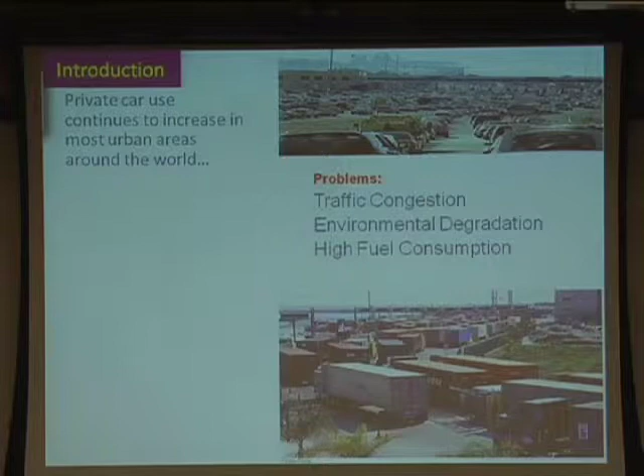Okay, so we're going to be changing gears, literally and figuratively, and we'll be talking about the real source of demand, if you wish, the real cause of demand for energy, and that is the transportation sector, and particularly the people who drive every day and actually consume all that fuel. And part of our focus here is a problem that we see daily, that is traffic congestion and the associated environmental degradation and high fuel consumption that goes along with that.

Now, congestion wastes fuel, okay? And that's why we're talking about it here. That's why when we look at energy demand and controlling that demand and curbing it, we have to look at how our system, in fact, is wasting fuel and wasting it big time. So congestion wastes fuel, and there's been various estimates of how much is actually wasted, that is, because of inefficiency in the operation of the system. Okay? So you're essentially throwing away money and precious resources through the kind of scene that we experience on a daily basis in our cities.

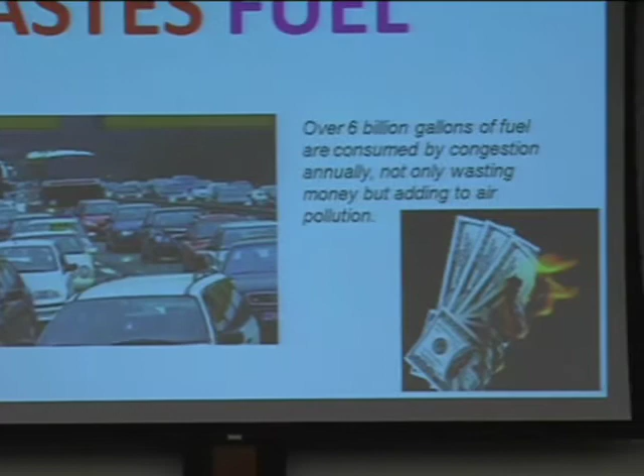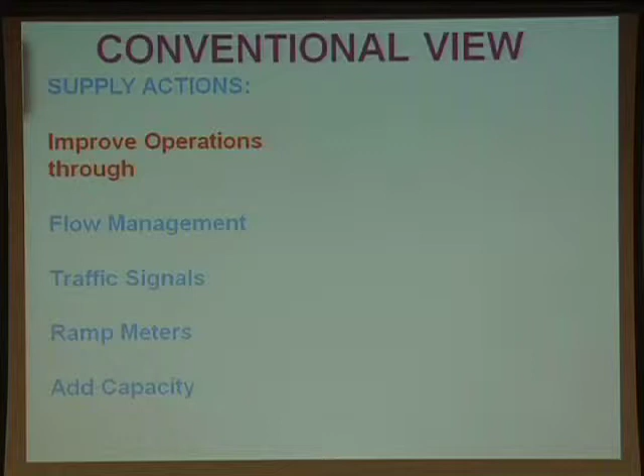Now, the conventional view for dealing with these problems is that you can take various supply actions, that is, try to improve operations through flow management, traffic signals, ramp meters, adding capacity physically. These are all actions that normally will improve flow for us. And you also have a set of demand measures where you influence the demand for travel, particularly travel decisions of route, mode, departure time, decisions to participate in various activities, to telecommute, to change the trips, decisions to own more vehicles in a given household or to reduce reliance on the private automobile, location decisions, where to live relative to where one works, and so on.

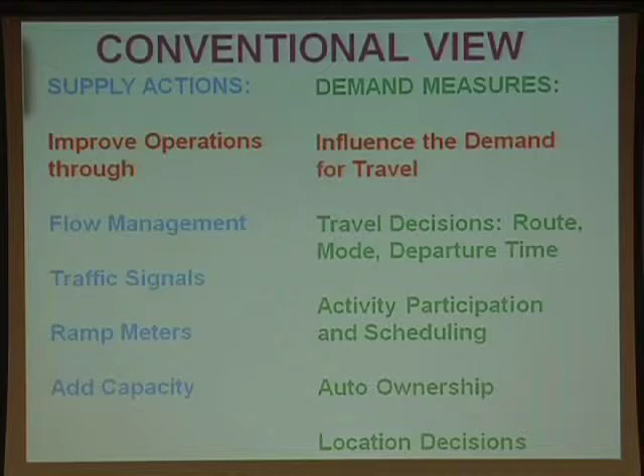So a lot of the field essentially has consisted of folks who try to improve traffic and then folks who try to improve behavior. But in reality, supply and demand interact very strongly in transportation, and both depend critically on the behavior of system users. And yes, this is who determines what happens in our transportation systems. And human behavior essentially is at the root of a lot of the system inefficiency that we experience, inefficiency in operation, inefficiency in fuel consumed, inefficiency of our delay time, and so on.

And we know, traffic researchers know, that the cognitive and behavioral limitations of human drivers are at the root of system inefficiency. Phenomena such as perception time lags, reaction times, and a natural tendency towards overreaction under stressful situations or perceived risk result in volatility, congestion, instability, frustrating stop-and-go patterns, phantom bottlenecks.

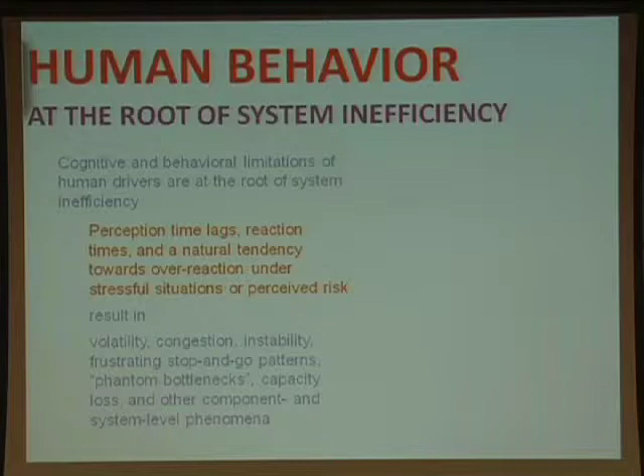You know how many times you've driven in traffic and you think there is something blocking it, only to find that there really is nothing, and people are just not moving. You know, that's perception, time lags. That's what we're talking about. So there's many collective effects that take place in traffic, and a lot of these inefficiencies that we observe are rooted in behavioral and cognitive limitations.

Similarly, if you look at travel decisions, you will find that behavioral considerations and attitudes of human drivers, households, and logistics managers are at the root of fuel-inefficient patterns. Activity patterns and resource allocation decisions obviously reflect individual preferences and lifestyles, but these were acquired during a time when fuel supply concerns were minimal.

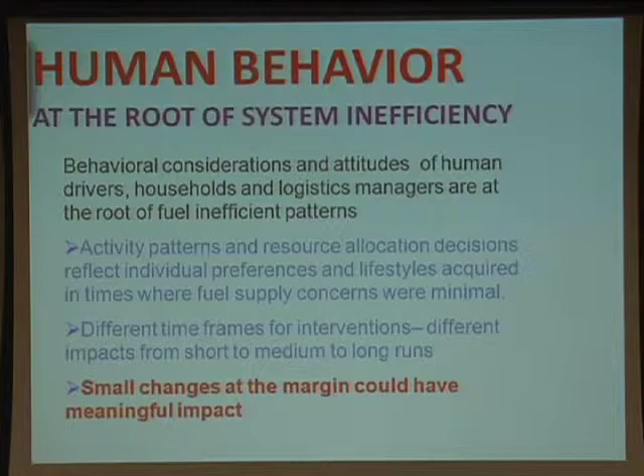People lived in the suburbs, got the big homes, big cars, and so on. And it's convenient, it's comfortable, but fuel concerns were not particularly an important consideration. And as awareness increases of these issues, and we try to affect people's behavior, of course, we're facing some ingrained attitudes and preferences that need to be addressed.

There's also different time frames for interventions and different impacts from short to medium to long run. But what is important and what I want to highlight is that small changes at the margin could have very meaningful impacts. And that's part of what I want to emphasize here. Now, behavior change is essential. What can one do? Travel less, travel more efficiently, travel green. I mean, this takes common sense to understand the kind of things that we have to do.

But on the other hand, as transportation professionals, as traffic professionals, we need to try and operate the system in ways that are more efficient for its users and for our system. Now, there are three main tools that we typically consider, that a lot of our research has focused on, to influence that behavior. One is through traffic controls, when you basically prevent people from doing certain things at intersections, at getting on freeways, and so on.

But increasingly, we have a very powerful tool, which is real-time personalized information. And we're just at the very beginning of really recognizing the potential of what could be achieved with real-time personalized information. And another tool is dynamic pricing. Of course, you have all forms of pricing through taxation, cap and trade, carbon tax, and so on. But in the traffic context, in terms of affecting congestion, you can essentially charge for the use of facilities and do it dynamically in such a way as to operate the system more efficiently. And that has been also a major focus of our research here at Northwestern.

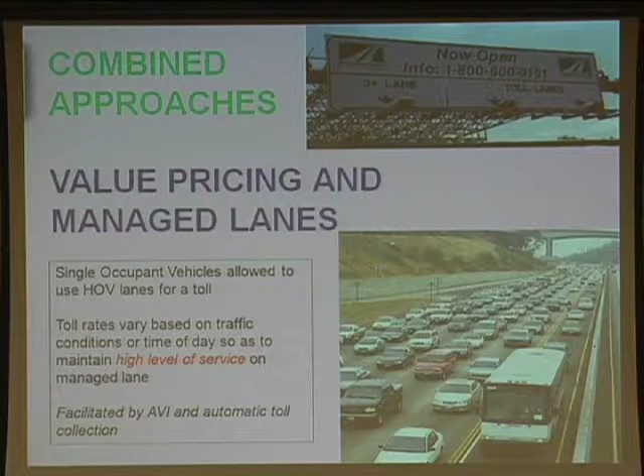Now, behavior change that we're interested in here, or what can facilitate it, is technology, particularly through intelligent management systems. And in this regard, there are two key realizations. One is that you can eliminate or reduce individual human error, and the system will operate more efficiently. And as I said, small changes in household and firm individual patterns could lead to significant gains in fuel-efficient, sustainable lifestyles.

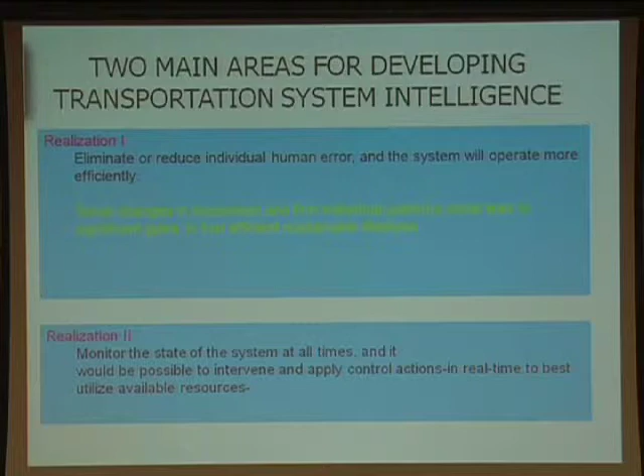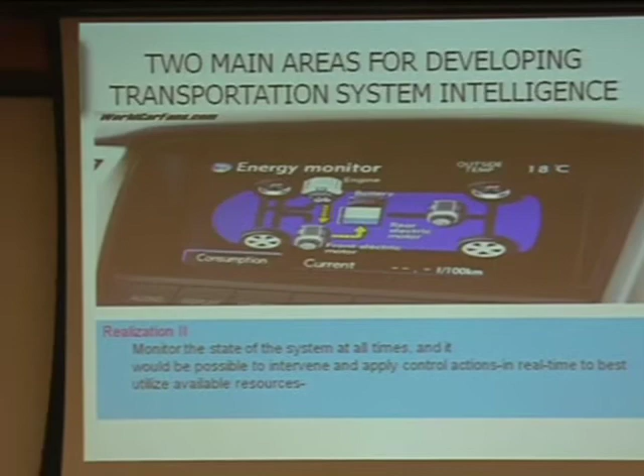The second realization is by monitoring the state of the system at all times, it's possible to intervene and apply control actions in real time to best utilize available resources. And this applies from the individual vehicle level to the traffic stream, to the entire network. The same logic of sensing, monitoring, predicting, acting, and implementing.

Some technological drivers: there's five of them that I view as critical to what we can accomplish in the transportation realm. The first one is in your pocket. All of us have wonderful handsets, which effectively have become small communicating devices, computers, displays, and so on. And what we can do with handsets is enormous and growing by the day, from navigation to commerce to social networking to purchasing and what have you.

Some examples of innovative applications: there's a company called CitySense in the Boston area that is providing a social networking capability on your cell phone.

Fortunately, I have videos that make these things move. I don't have them with me because it's not my machine. It's too complicated to link everything.

But these can be used to study travel patterns. They can also be used to see where your friends are, essentially, which bars they're going to and what have you. And you have probe-based connected navigation systems where essentially people have given up on the government trying to provide the kind of infrastructure and information services. And you now have private clubs, if you wish, that are emerging, where people are connected and they agree to report their information, essentially.

So you have GPS navigation in your vehicle or that's handheld, and you agree that your information is going to be reported to some central entity that is then using that to estimate conditions, predict them, and then give information back to the members of the club, those who are opting in. Some of these are beginning to emerge. They're relatively small scale, and the coverage is not large enough, but we're getting there.

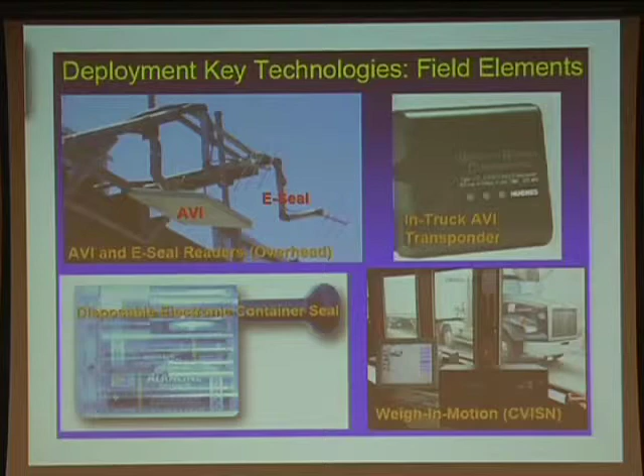But most large fleets are equipped with tracking devices, so you can know at all times where the trucks are located, can dispatch them, and operate your fleet more efficiently. Coupled with, again, technologies that were introduced for security applications but have implications for efficiency, such as electronic seals and readers at ports and so on.

Putting all of these together, essentially, the internet with mobility, you get telemobility and telelogistics. That may entail changes in the nature of activities, of what people are doing, their location, interperson, interfirm interaction, and the process of activity generation and scheduling.

Development number two are inexpensive wireless sensor networks. This is now giving us the view from the asset perspective, from the infrastructure perspective, and you combine the view from the particles themselves, the individuals, and the view of infrastructure or fixed assets, then you get a lot of real-time information. And again, a lot of the work that we're doing and areas where there's a lot of commonality between our agenda and that at Argonne's traffic analysis laboratory lies in developing the kind of methodologies for real-time decision-making given that kind of information.

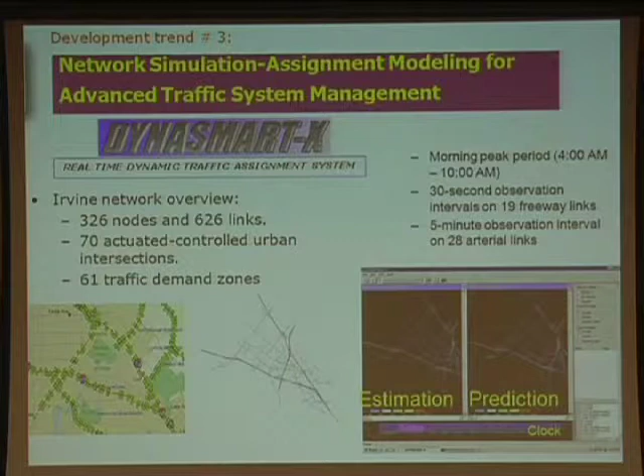And here at Northwestern, we're working on, again, real-time estimation and prediction software that can simulate large networks, estimate what is happening in the network, and then predict what will happen over the short term so as to generate control actions, and also to provide information to users. Okay? Talked about personalizing information.

Well, there's been a lot of interest in, of course, what information can do. And what was seen, in the initial wave of looking at this problem, is that information can make things worse. Why? Because people can overreact. You give everybody the same information on what you have now. People will do the same thing, and that will create congestion on facilities that are even less prepared to handle that kind of traffic. And so we know that the solution to this is prediction.

When you give information that is based on predicted conditions, not on prevailing sensed conditions, that poses certain challenges, namely trying to capture user responses to the provided information, the issue of consistency, the issue of reliability, and then computation for large networks. And that, again, is a specialty that Argonne, of course, is very well known for and an area of common interest for us.

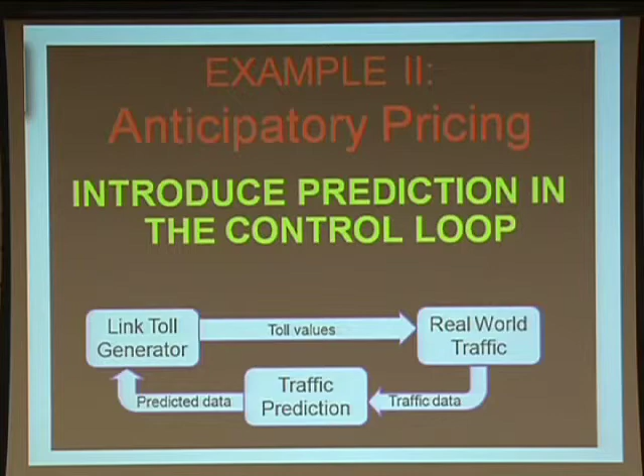Another example where we've been very active is to do the same thing, to use prediction for pricing, to introduce prediction in the control loop so that from the sensed traffic world, we can go into our prediction tools, our simulation-based prediction tools, and then set the prices accordingly. And we have found that we can, in fact, eliminate this breakdown through that particular process. Development trend number 4 is developing decision support tools for fleet management and collaborative logistics. I won't say very much about that.

And the 5th one, the area of peer-to-peer ad hoc networking. My colleague Fabian Bustamante here at Northwestern is one of the leaders really in this area, and it's one that holds a lot of potential for providing all of the benefits of connectivity among vehicles and really bypassing major investments in the physical infrastructure because the vehicles become the network.

Of course, it's not all about vehicles, and a lot of what we're trying to do is get people to use more efficient means of transportation. That, of course, typically refers to public transit. So how do we get people to make the change from this to this? Okay? Those of you who are experts in marketing recognize that you do not have a winning proposition in trying to get behavior change. Okay?

So we've been looking. What we need are more carrots, essentially, to induce behavior change rather than simply taxing or you cannot do this, you cannot do that, you cannot use your vehicle. You really need to give things that people are interested in getting. And we've been talking to a colleague in a new institute that's being set up here at Northwestern, an institute for massive change that Bruce Mau will be leading. And we're talking about reinventing the transit experience.

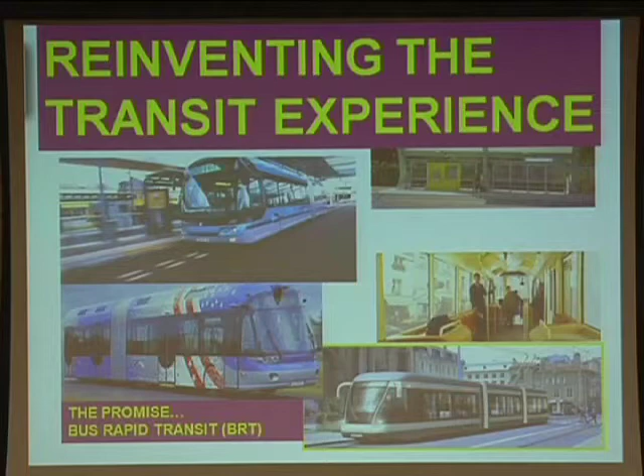And one example of this is bus rapid transit. But imagine an enhanced environment coupled with personalized information and connectivity and pleasant surroundings that may, in fact, make it much more attractive for people to change their behavior.

Now, our transportation center here, just a few closing words, our vision for it and our aspiration is to be a preeminent think tank and laboratory for cutting-edge transportation research that matters on a global scale. We want to be partners for all novel, high-impact research, and certainly Argonne is a leader in this area, and we look forward to interacting further in this regard. And we do seek to advance the state of practice through a mix of engaged application-driven research and fundamental advances.